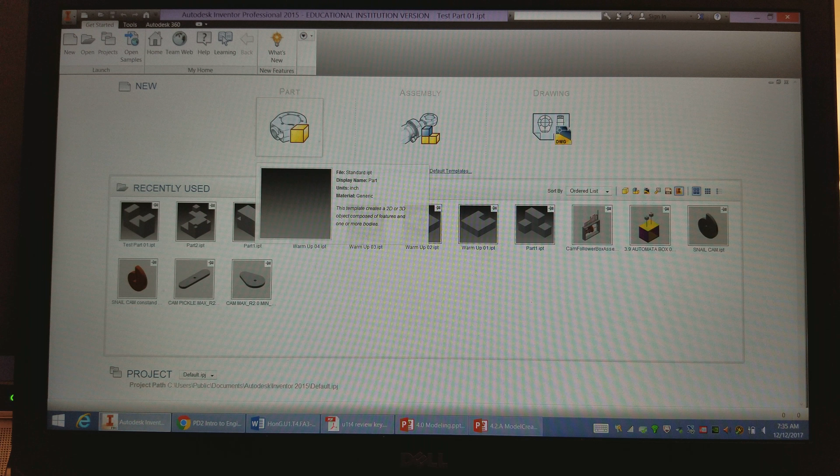First thing we're going to do is click on Part. Always name it before you even start. I'm going to do test part 02. Enter.

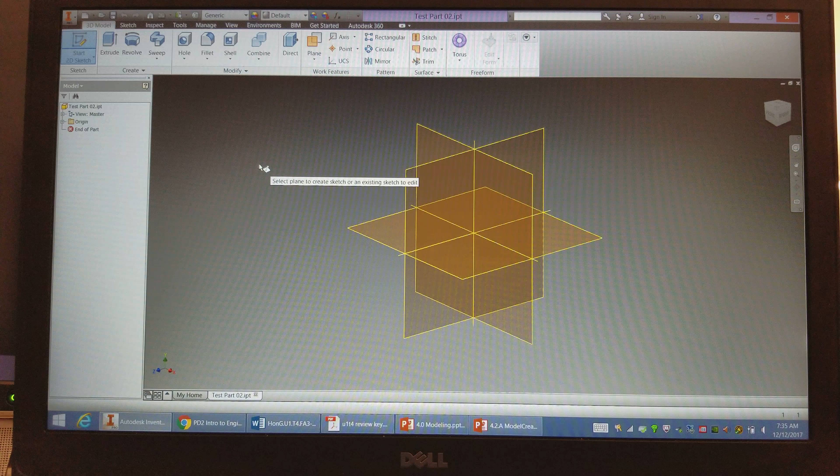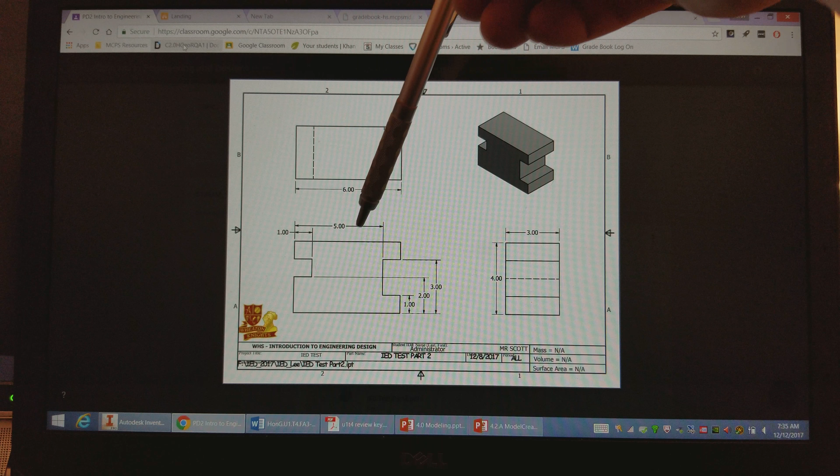We're going to pick a plane to work on. A good one to usually start on is X and Y. And I just need to make a rectangle of the correct size. So according to this, I need to make a 4 tall. The whole thing is 6, but I'm going to do the 5 by 6 first so I can add on these later.

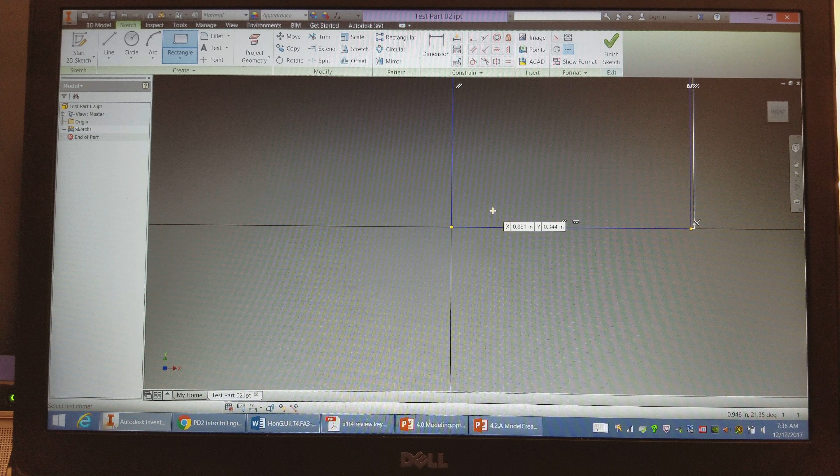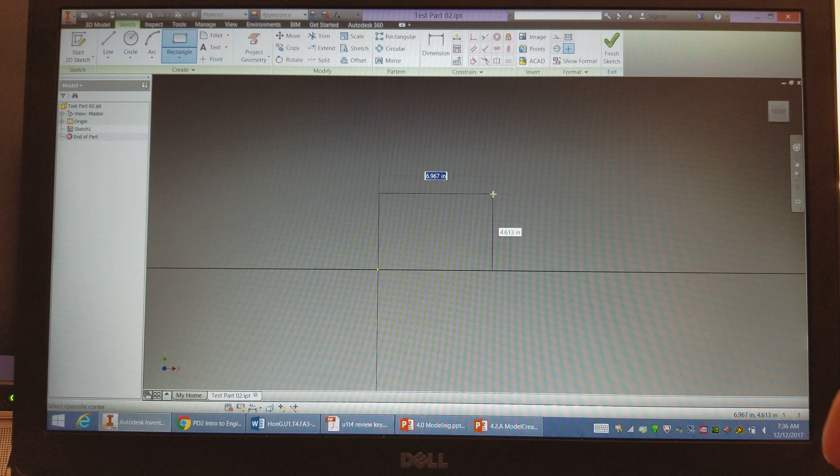Click rectangle, hover over this, the origin until you turn green, and I'm going to type in 5 tab 6 enter to give me my 5 by 6 box. Wait, I didn't want 5 by 6. Let's do Control Z. Rectangle again. What do I want? 4 by 5. Okay, try again. So, 5 by 4. There we go.

Okay, and I'm going to extrude. So first I need to finish sketch. Zoom out so you can see it, whatever view you want. And let's extrude. How far do we need to extrude? 3 inches. So I'll put a 3 there. And looks good to me. Go ahead and hit enter or the checkbox.

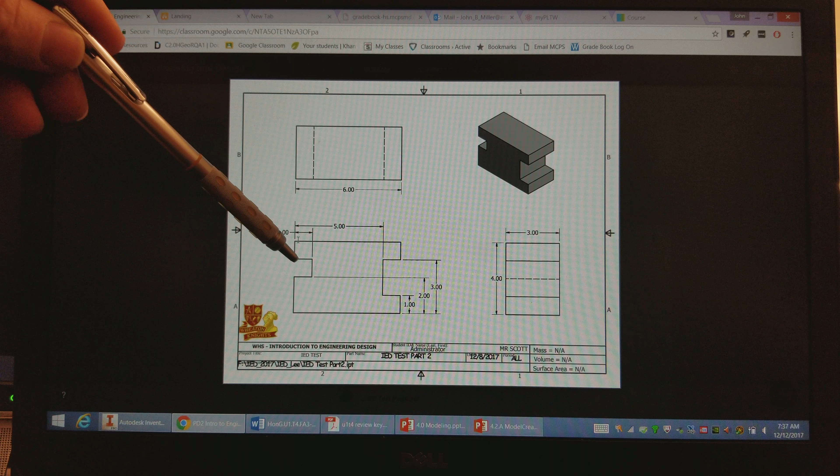Good. Okay, so now we need to take a piece out of the front face, but we need to figure out where and how big that is. So, looks like it is 1 inch. And according to these, 1 inch by 1 inch, 1 inch from the top.

Okay, easy to remember. All right, I'm going to work on this face here. So, start sketch, click on that face, turn it around however you want to see it, and I'm going to make sketch rectangle.

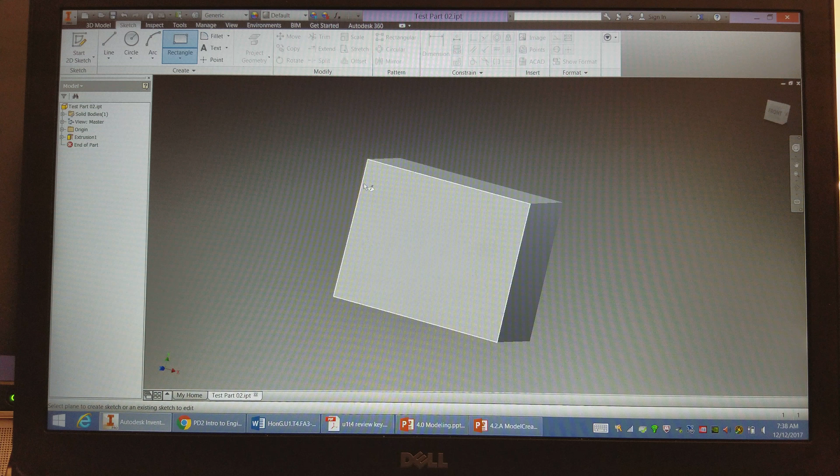Okay, this little guy, whoop, lost him. That little guy pops up, letting you know that you are on the side. Just going to make a rectangle. Before I click again, I'm going to hit 1, tab 1, enter.

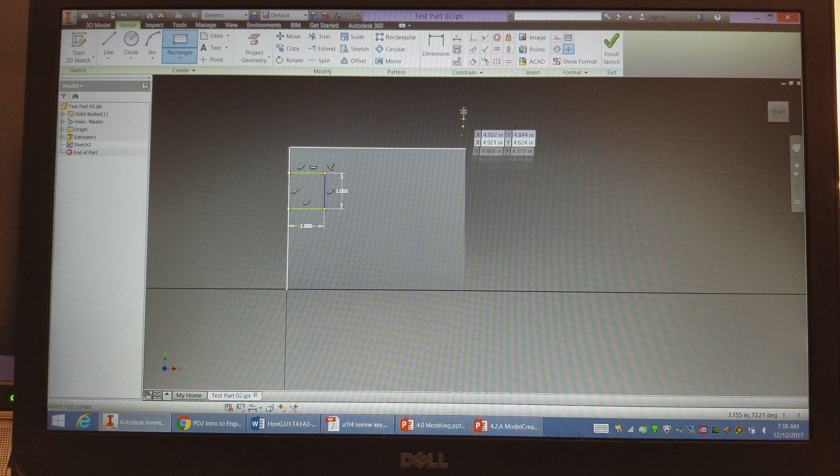Now I need to make sure I'm the correct distance from the top, so I hit dimension, click on this guy, and then the top line, and it should click on the top line. Oh, and there we go. Now I can make sure it's 1 inch from the top.

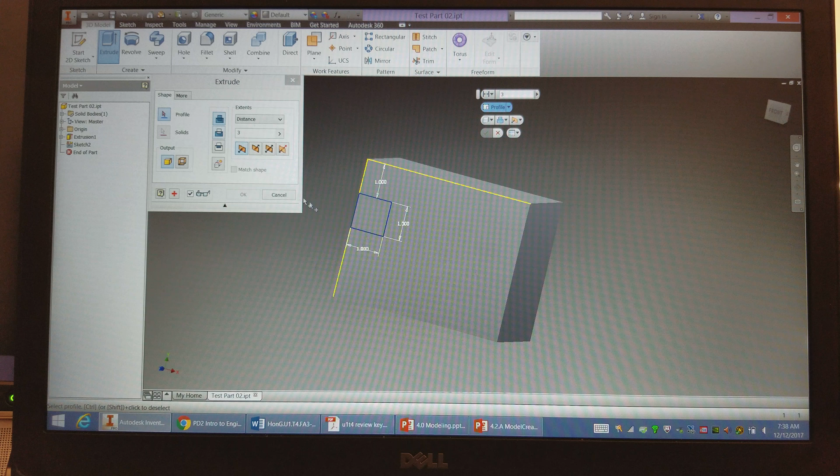Perfect. Finish my sketch so I can extrude it. Always have to finish the 2D before you can go to 3D. So let's go back to 3D model and extrude, highlight it, and we want to go the other direction, so we want to cut it out.

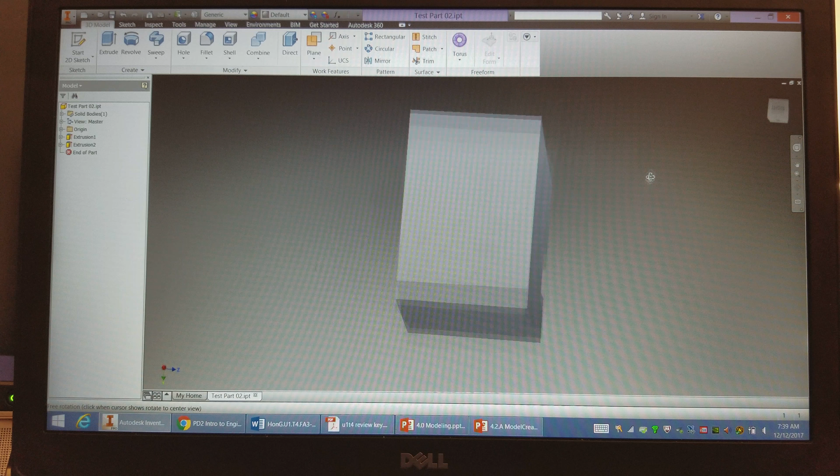And we can either do distance or all in between. Let's just do distance 3 inches deep. That's all the way through. And hit the home view, make sure that everything turned out the way you want, spin it around. Alright, let's go back to home view.

Now we need to add some stuff on the back here. Let's go ahead and do that. So we need to add a 1 inch by 1 inch across the length of the top, and a 1 inch by 1 inch across the length on the bottom. Let's go ahead and do that one at a time.

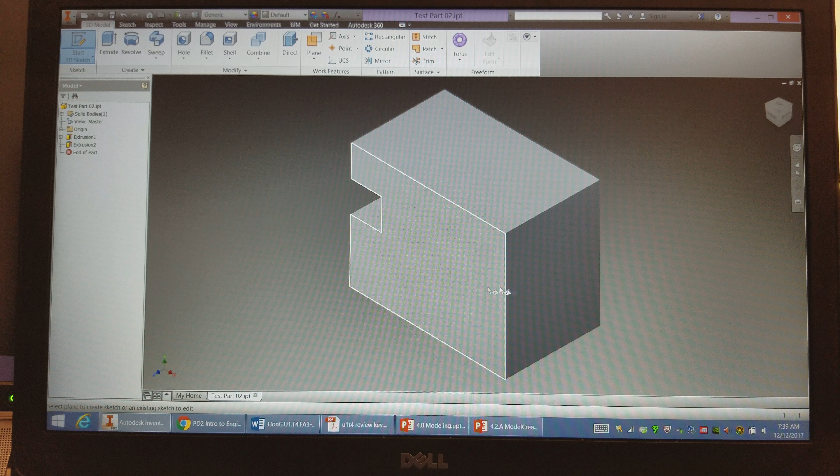Okay, start 2D sketch on this plane. Pull it down so you can see it, and let's make a rectangle. Now if you lock it in the top corner, you know it's going to be all the way on the top. You know that by the little green dot that appears when you are on the corner. And if we go all the way to the other side, you'll see this guy pop up, so you know you're on the side. Now, we need that to go all the way across and perfect dimensions.

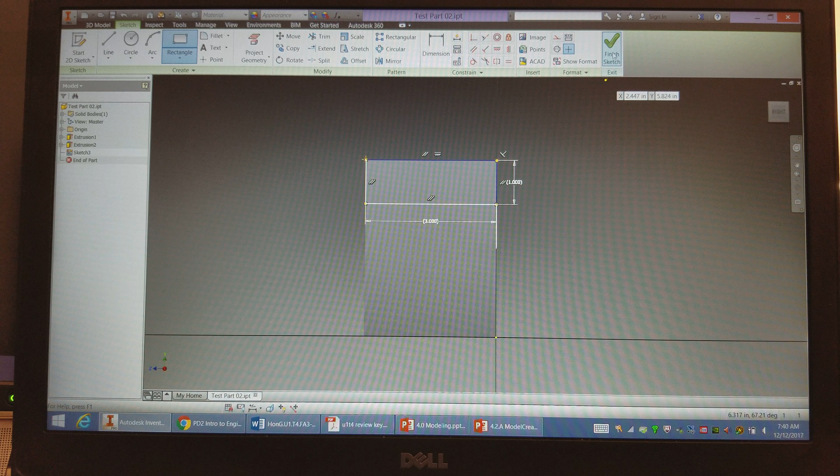But I can lock that in by typing 3, tab 1, enter. So now I can hit finish, and we can extrude it. We need to extrude that 1 inch, so let's just type in 1. Nice little preview showing us that everything looks good, and enter. Okay, spin around, yep, looks good.

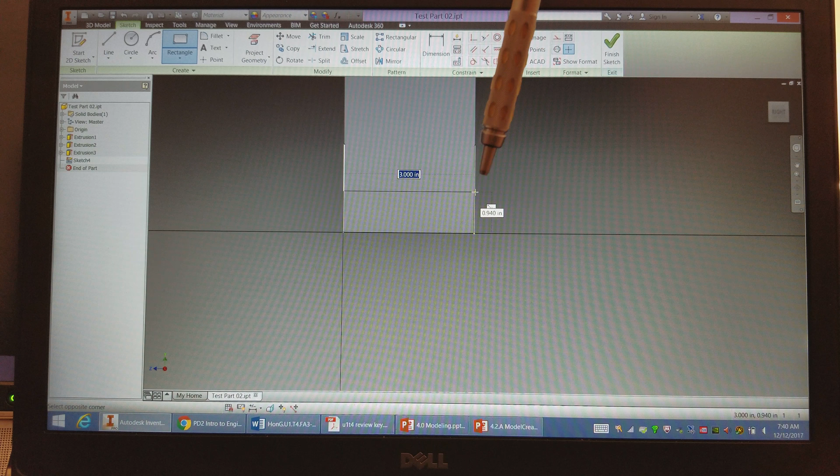Let's do another 2D sketch down here and do pretty much the same thing. Rectangle, lock them into the corner, lock it into the side, and since I already have the 3 that I want to change this, so I'm just going to start by hitting tab and 1, enter. That's set. Finish sketch,

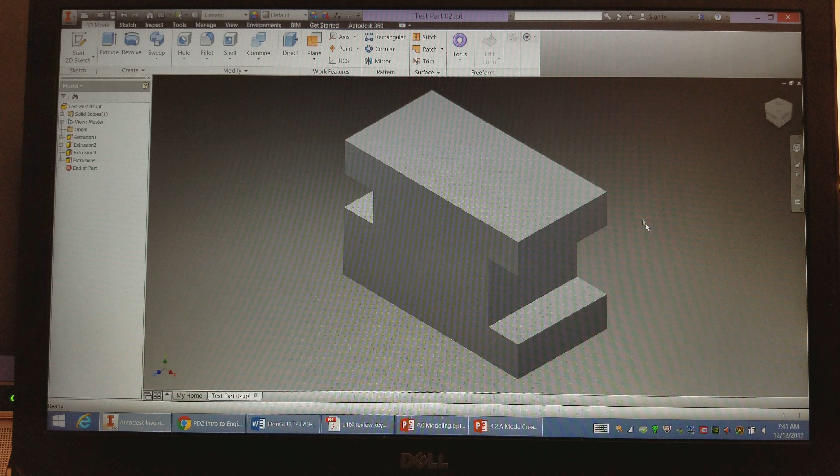Extrude, and it already does it 1 inch. Hit enter. Let's take a look. Is that what we wanted? Yep, looks about what we wanted. And we can spin around, make sure it's exactly what we wanted.